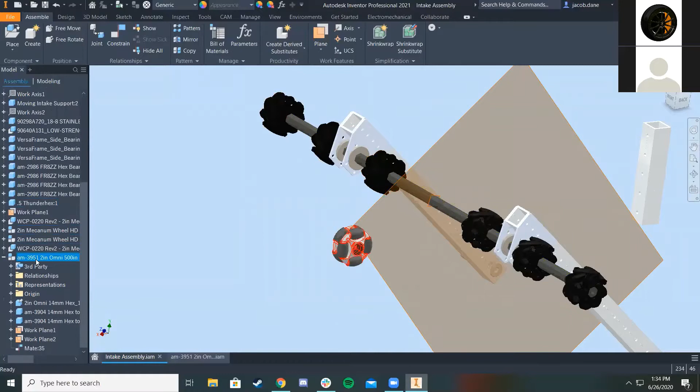Why is it not looking like that? Oh, there are already constraints on it. I think that... no, there aren't. Oh, this wheel is so annoying.

Here, I'm gonna try something. Okay, I'm gonna wait, maybe if I just... yeah sure, that'll work. It's not actually merging with it, but it works, whatever. Okay, and so, are we gonna put two wheels there?

I don't know, we can put like 3. I think the video you showed, the video is 3. And the green one too. Do you have the green one already? I don't think so, it's on the same place we downloaded the other one, just AndyMark I'm pretty sure.

Very nice, this one. Wow. It might not actually be green. If we want, we might have to just color it green, because it could be the same file for both. Yeah, I mean AndyMark probably is.

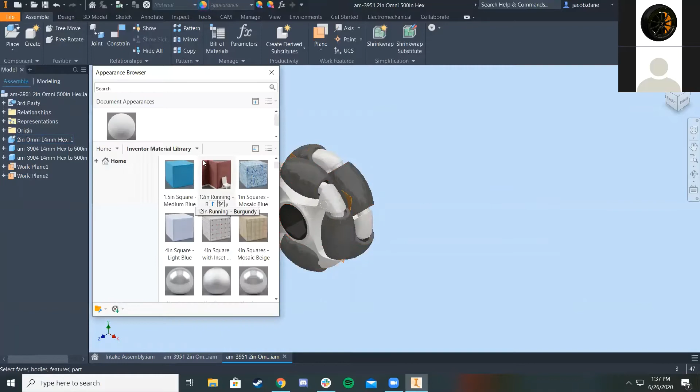Can I just select? I know I can select faces. I'm just gonna try to color the whole thing. That's very nice. Jonathan, do you remember how to just select certain faces and not the whole thing?

Click on... well, you can do it in a regular way, like something that you make, but since this is only one part... I don't know, because each one of those is not really... Oh yeah, 'cause this body counts as one part, so you may not be able to do it. I guess you could just color the whole thing green. I'm just gonna leave it for now, and we can also make that decision later.

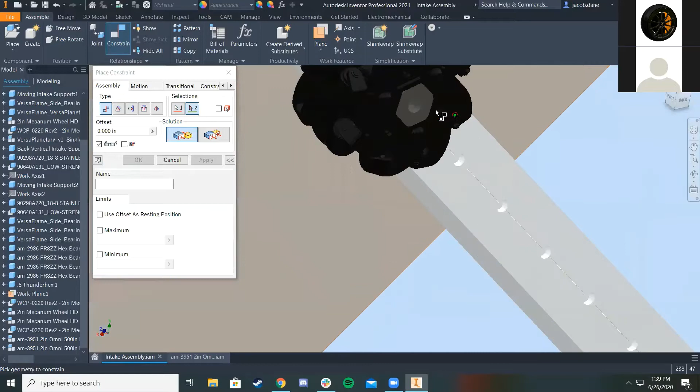Actually, I'm gonna do the same thing as I did before. Instead of clicking on the actual hex faces like Jonathan did for all the mecanum wheels, because that was being weird, I'm just going to click on this circle and then on the circle inside here. It basically just constrains the middle of the circle I clicked on and the middle of that inside too. So I'm just gonna move it out. Oh gosh, it's doing weird things, but once I constrain this face, it'll be okay.

Also, there I was just copying and pasting, because copy and paste makes everything easy.

Oh, okay, that's right. Very nice, now I have 3 wheels in the middle. Obviously this is also just a CAD file that can be very easily edited. So like, let's say later we decide we want more mecanum wheels or whatever we need, we can just change it and it's not a big deal. But this is just to show the general design.

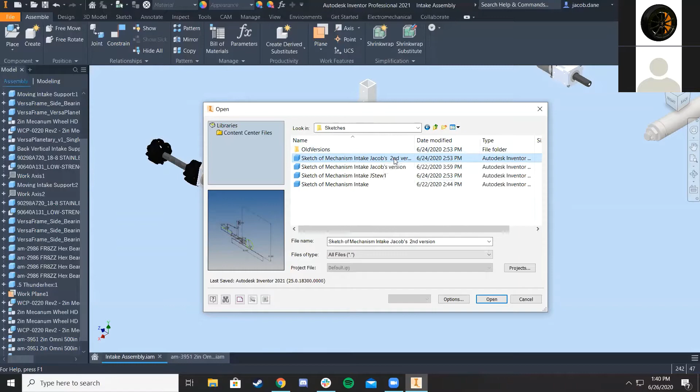Okay, I'm gonna bring back up the sketch and show you guys and kind of explain what I did. Oh no, I didn't save it here. That sounds so lame. I'm gonna save this. I don't know why I didn't save in the right spot. Maybe it's still in this folder. Yeah, it is, okay.

Oh, I also have to bring up the parts. Okay, so for this I changed it — instead of it used to be 10.5 to 15.5, I changed that to 11 to 16.

And so basically on the side, I did the math, because the pieces that I'm going to have to use for the pivot mounts are going to be these two pieces — I think this is one of them. Yeah, so this piece screws onto the end of the piston, and then this is the actual pivot point, so to speak, from where you would actually mount it. And because this piece, as you can see in the drawings, extends it a little bit, by about half an inch, instead of 10.5 to 15.5, it has to be 11 to 16.

So I added some things. And then these hexagons, I can just take that out if you want, but I put them there to represent that this is not a static point — there has to be some kind of joint so it can change the angle, so to speak. It's basically just like a pivot point. So here, touching the ball still, and then I can change this to 11 and put it back.

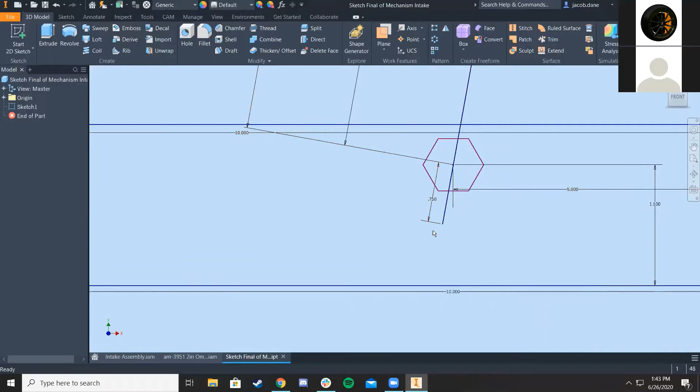Same thing here - I didn't represent it, but this VersaFrame piece will have to be longer than 5 inches so that there can be a hole at 5 inches. That'll probably just be like 5.5, but yeah, okay.

For this piston, to actuate it, I think John separated the piece last time - I can try to find that. Speaking of the piston, it'd be better if you assembled it in the actual intake assembly file so you could animate the whole thing there, instead of opening the piston separately and moving it, which would move the assembly. Yeah, it's already separated into 2 files, so you'd just have to constrain it together.

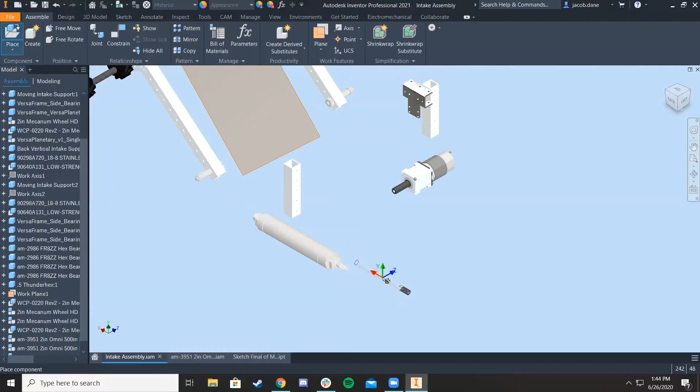Actuating portion, very nice. Because I think this is going to merge weirdly, I'm going to go ahead and open this and delete this end, just cut it off. I already made one with everything except for that one you're about to cut off.

Okay, I'm pretty sure you can just place it. This is the right way. It's kind of hard to tell from looking at it, but from all the pistons I've seen, the longer screw end is always the end that doesn't have the throw of the piston. Okay, I'm just going to leave this.

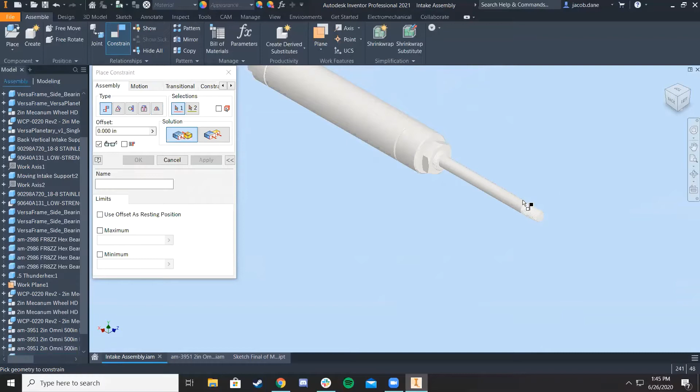So to constrain this, I'm first just going to constrain it with the tubes itself, and because I know that it's 10.5 to 15.5 for the actual piston, I can just constrain it.

I think this should work. It looks super dumb at first. Actually, I'm not going to do it first, I'll do it last. I'll click this face for now, but I'm going to go ahead and put the max and min to 10.5 and 15.5. I might have to make those negative depending on the direction. Maybe it just doesn't even show it - that's kind of weird.

Okay, there we go. I'm just going to go to the part, edit it, and make it negative. Oh, because math - okay, that makes sense. There we go. I'd have to make the maximum negative 10.5 and the minimum negative 15.5 because negatives are the opposite, and yeah, there we go.

Piston is moving just how we want it to.

Now I'm going to go to my McMaster to find this part - there's the name of it, but I'll just go to this first. If you go to pistons, round body air cylinders, double acting round body - actually, no, I messed it up, I think I just look at piston mounts.

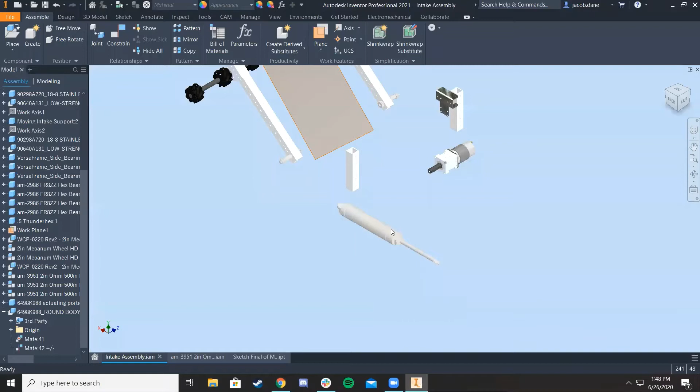If you look at piston mounts it doesn't show it, but if you look in the round body air cylinders and then the kind we want, which is double acting - yeah, okay there we go. If you scroll down then they're all there, all these different mounts that McMaster has that go with all their pistons. So we need both ends of pivot, so I'm going to use these two right now. Our bore is 1.5.

We can go, and the bore is just this dimension, which is okay, it's a little bit more, but it's a 1.5 throw, 1.5 bore piston. I already looked at the dimensions, I selected this one. I think I couldn't find a difference between them because - oh yeah, it's a piston bore. Isn't the piston bore the size thread of the piece? I thought the bore was like the actual piston actuating part.

I don't think so, I'm pretty sure the bore is - what's it called - because like here, diameter. This is kind of in the way, I think it's like duplicate or something. Forget a McMaster. Oh my god, if I go to pistons and then bore size, it's not showing a picture, which is annoying.

I mean, I think if you just go to like a drawing - it calls it outer diameter there. So bore size, okay, it says bore size half outer diameter - wait, that's kind of weird. I feel like just click on one of them and then look at the drawing, you know what I mean? So, oh, that's really weird looking.

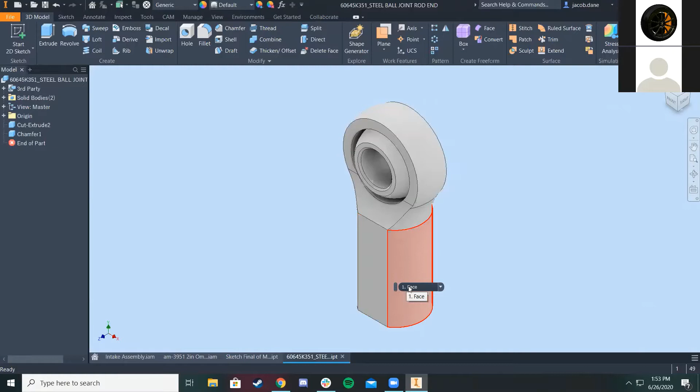Very nice, that's exactly what we need. Save it. And if you didn't already select the right folders and stuff, you'd have to go through to make sure you're saving in the right place. But I already know that because I saved this step file in the right folder, it will just open automatically in the same folder. So yeah, make sure all your files are in the same spot always.

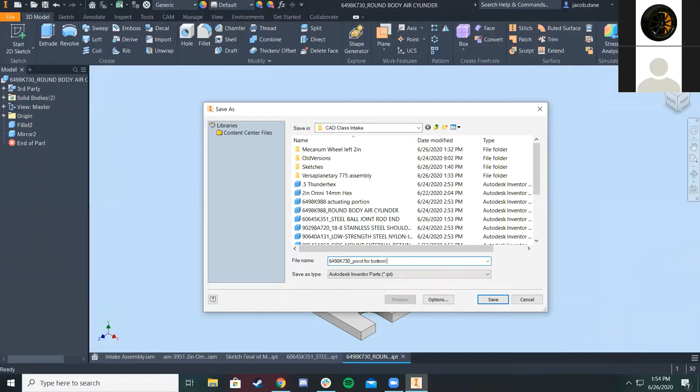Why is it? It makes you think it's not right, but we will see. Oh, it is right, that's such a weird name. Okay. Very good naming.

There we go. And then I'm going to go ahead and attach this end of the pivot onto the piston. That's not facing the right way. There we go.

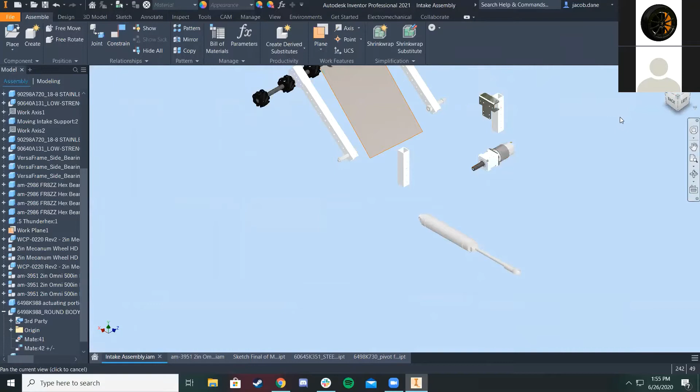Okay, and also from what we did earlier, Jonathan, when he constrained this piece against that, I changed the dimension because I also changed it in the sketch file. So we need the dimension from, oh okay, it's a 15. Oh, it's gonna be kind of annoying.

Okay, so I'm gonna go ahead and make the hole in the VersaFrame here. I'm gonna leave that using the 1/2 inch shoulder bolt size, and then I'm gonna constrain it to that hole relative to the other VersaFrame piece here. Oh, it's already there probably. I don't know if it's not. Oh, I also might change the dimension. Oh, shoot.

So, okay, so now it's 12.5 inches plus 1.25 plus 0.75. That's 2 inches. Okay, that's 14.5 inches.

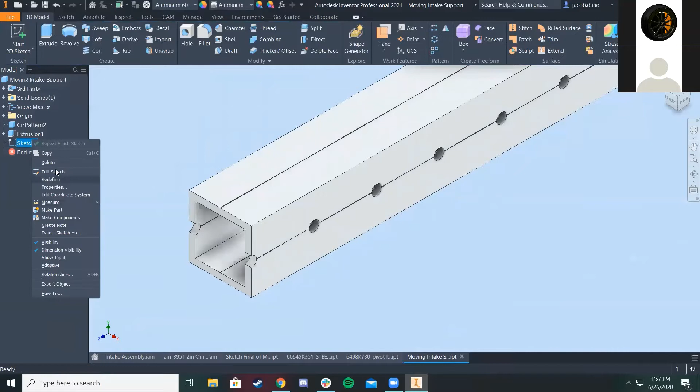Then I remember, because I made the drawing, the part size so that the hole is centered. Actually, I should make a sketch. That's bad practice, but I made it so the hole is centered about this hole right here, so it just makes manufacturing a lot easier. But yes, I measured it.

Wait, that doesn't make any sense. Hold on, that doesn't make sense. Wait, actually, I shouldn't measure it. Might be increased. This is a few days ago, so I might have messed stuff up. Wait, what did I mention? Oh, that's weird. But that's an inch away, and I think it's supposed to be, I made it 0.75.

So, yeah. So I wanted the hole to be centered, and it needs 1.25 of there relative to that center. So, oh my gosh, so much thought.

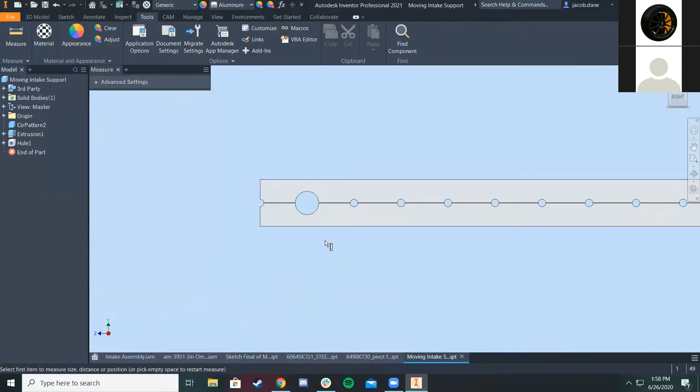Okay, I think, okay, so I know, wait, excuse me, I know. So this pivot point to the end needs to be 1.25 plus 12.5. So that itself has to be 13.75. But...

Very nice. It's not, definitely not. Why? Oh. Okay.

So yeah, that's 13.5, and we need 0.75 more. That's okay, I am confused right now. So I'm gonna go ahead and actually, okay, so yeah, the hole is already here. I can just look at this dimension.

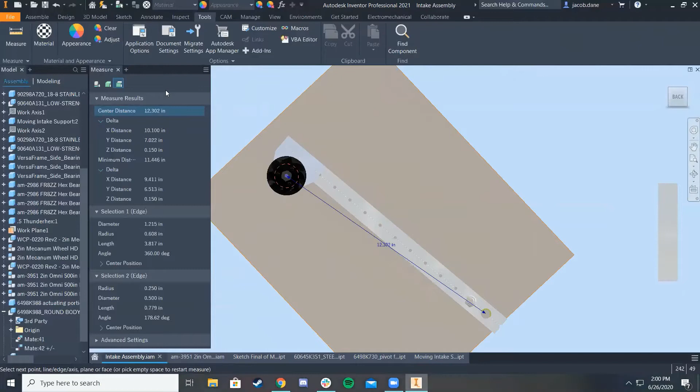That to that. And oh gosh, this is not gonna be nice. Because, okay, so I need this hole. That's 12.25, and it needs to be 13.75, right?

Yeah, so I need to extend it. Wait. Oh, that's actually 12.5, that makes sense. So that means, okay, yeah. So the hole is actually not aligned on there just because of how I made all the pivot points, but that should be okay.

That just means I have to make this hole very different. But we probably have to mill that, because that's like an annoying placement. So I need to make a, I don't want to make it concentric. Okay, I'm going to just edit the sketch then.

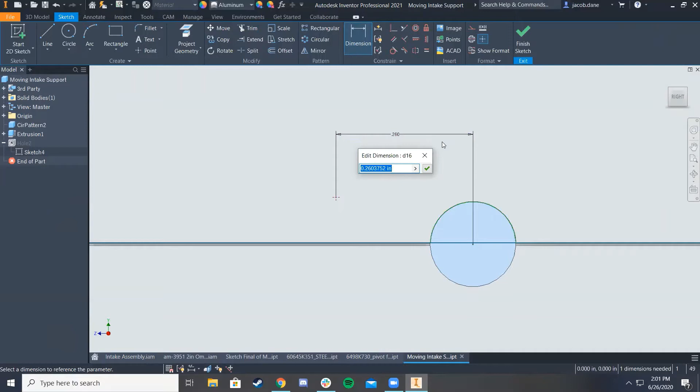Yeah, 0.25. And then this needs to be an inch. That looks super dumb. Okay, I mean, that's fine, but not fine.

Might need to change the sketch more. But okay, I'm gonna try to make it, see if I can just move it over to 12.25 long without messing up things in the sketch. Make this 12.25, that makes that a little bit shorter.

It's down, okay, that's fine. Then, check. I feel like I'm so confused.

But that's 12 inches. Oh, because that is 12.25. Oh my gosh, I messed this up. I'm just like, okay, I feel like I'm being super confusing right now.

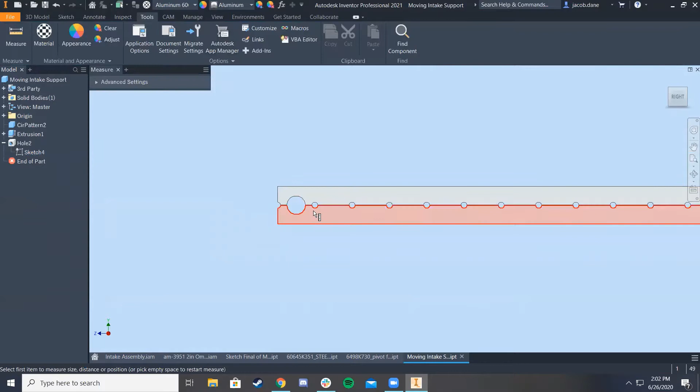But basically, if I put this hole here to this middle one, which is, oh gosh, which is the same point as the other one, that's 12.5.

And then go back to the mechanism. Make this 12.5, that is fine, everything fits. Go back to the assembly. Take a look, this hole lines up with that hole, which is exactly what I want. Okay, hole's in the right spot now.

And then I just, oh my god, let's undo these constraints. Oh, that's right. Okay, yeah, so right now it's...

I think, Jacob, all you have to do is just delete the bolts, because the VersaFrame spinning is not dependent on it. But after, I can delete the bolts, but I need to just reconstrain, because right now it's about like that line right there to this edge, and I need to change that to the correct dimensions, and I don't know which that is.

Wait. Oh, I think it's this one then.

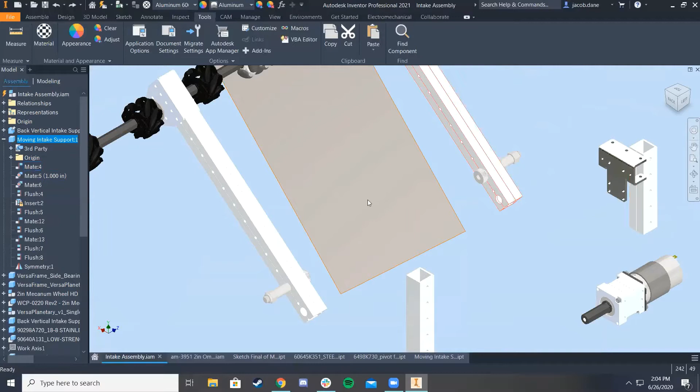So, okay, that's constrained. Wait, oh okay, I understand. That's constrained to that face. And I think...

So, okay, so in the sketch it is, I think, only like half an inch down relative to the bottom of this piece, because it's like 3/4 of the way in this 2-inch piece. Yeah, it's 1.5 inches up, and it's half an inch from the top of the VersaFrame, which is the bottom of this piece. So that's the wrong thing.

I need to change the dimension I was just on. This mate, oh my god. This to, wait, is that not? I think it's gonna make this. I'm gonna look from the side.

Oh, it's about that bolt. It is, okay. Okay, I might have to reconstrain this because it's getting a little wacky. Oh, I see what's happening.

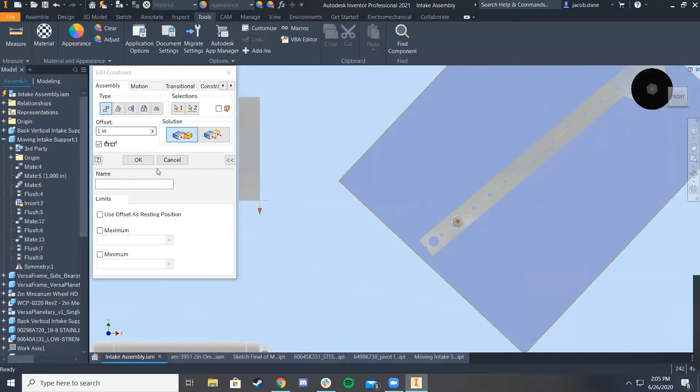Okay, I'm just gonna delete. Is this an assembly, or is it just on? It's just on there, you can just... okay, you can delete both of them.

I'm gonna actually... and there we go. Oh, this is okay. Oh, okay, it's okay.

No, I'm going to leave this constraint, and then this one's free, and I think it's... okay, so I need to go back to the sketch.

So I'm going to take... can you use the measure tool? Oh, you can, that's convenient. Okay, so the front edge of this Versa Frame. Oh, but oh my gosh, okay.

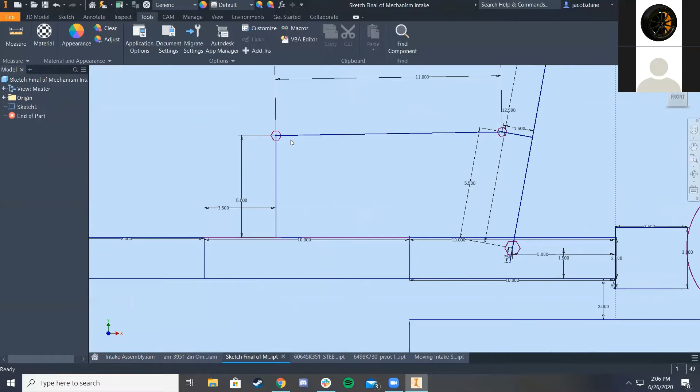So basically, I remember this has to be the pivot point of the back of the piston, and that means with this part, because this is the back of the pivot point, it's going to have to be mounted on the side. So I'm thinking to mount this against the wall of the Versa Frame horizontally, so it's on its side, and that means this dimension, 1.38, is actually the distance from this pivot point to the actual face of the Versa Frame, which might be hard to picture, but it just means I have to make it 1.375 or 1.38 farther away.

So then it actually says in the sketch, if we use the measure tool from this edge to there, 11.5 plus 1.38, which I can just do in CAD. So that hole to this face needs to be 11.5 plus 1.38.

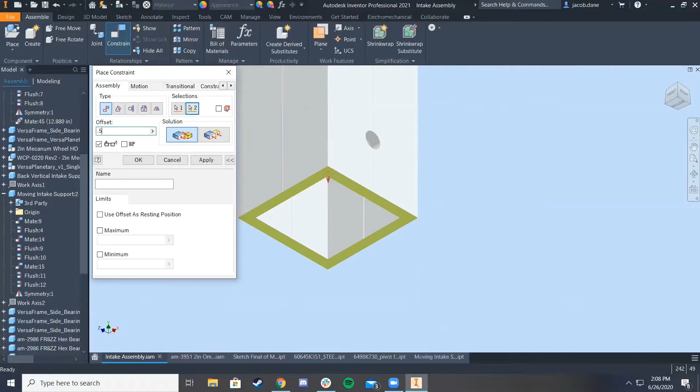And then you need to constrain this from the bottom - oh no, from the bottom by a half inch. And that should be fine. I mean, everything's kind of dependent because of constraints, but once I fix this other piece, it should be good.

This to this. Hey Jacob, one thing - it'd be a lot easier if you just constrained the second piece to the first piece, so we don't have to edit one set of constraints later on, because we're definitely going to have to edit this, you know.

Yeah, okay, so this is what I was talking about. Instead of doing those weird constraints again on this piece, I could just make these pieces flush together basically. So if I do... I guess these two moving together - actually there might already be one, okay, it's not, okay. And then if I make the bottoms flush, then it should be fine. Yeah, very nice.

Okay, I'm going to go ahead and copy this whole assembly for here. Okay, that's the same thing. Very cool. And then, oh yeah, this half inch piece also has to be slightly longer. So like... so I was trying to think, because the problem I'm having, Jonathan, is that I didn't see with this piece.

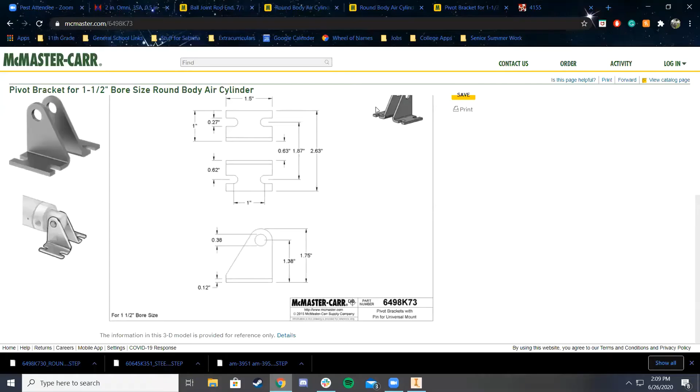That it's obviously wider than 1 inch, so it can't just be placed on a singular piece of 1x1 or mounted that way. Oh wait, never mind, I just realized I'm not using this piece. I am so dumb, I'm so sorry. Okay, I remember my thought process from the other day.

Okay, so actually I'm not using this piece, and I found big strong brackets on 8020, so I think... yeah, so this is the bracket that... wait, oh my god, I need to remember. Okay, no, this is the bracket I'm going to use to mount this piece onto this actual intake mechanism. And then I was going to use this one because that's way easier than that crazy thing onto the 1x1, and it does fit.

We might have to round off the edges a bit, but if you look at the sketch, when you change this line, the angle is not really moving a lot, so I shouldn't need to shave down this piece, but yeah.

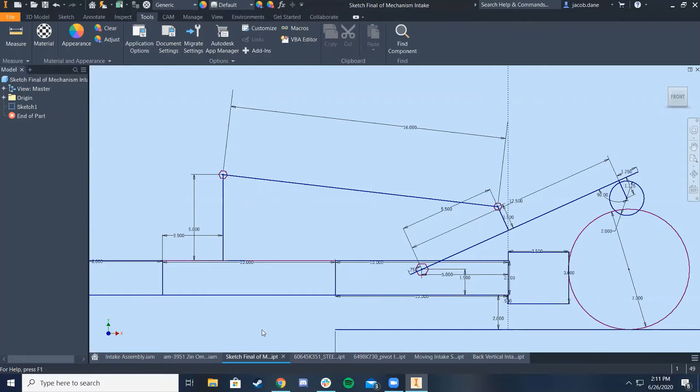And also, the idea is that to download this piece, you need an account from 8020, which makes this difficult. If you're watching this, to get parts in 8020 you have to make an account to download this part. Later on, we might open this CAD up on the internet so you guys can download it separately and get the files that way. But if you're just trying to watch along and do what I'm doing, you'd have to go through 8020 to make an account to get these CAD files. But the one thing about 8020 accounts is you're not actually making an 8020 account - you have to make a Part Solutions account, which is a whole different thing.

So that was the pain, that was why in the build it's really annoying, because you have to go to this random website and make an account. Download random files from this other website. Okay, that's sketchy - generate CAD. Very nice. But yeah, so I can do this, but if you were to try to go through the same steps, it would pull up this thing and say you don't have an account, you have to make an account, blah blah blah. Oh, that's so weird, I sent in a zip folder. Whatever.

So I have to unzip it to actually make this okay. Oh, because it has a terms of use stuff. I don't care, no offense. 8020, but I don't have time for that.

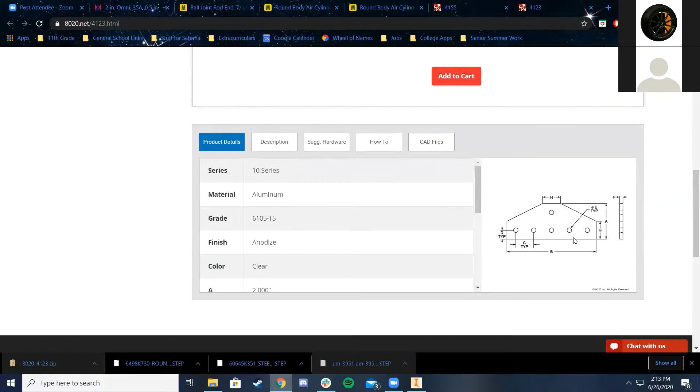Something nice about 8020 is, like most websites, they have the details and all the dimensions. Okay, they actually don't have the dimension that I need. I know the holes are spaced out by 1/2 inch, which gives a dimension, but because it doesn't officially say, I'm just gonna go to the CAD file and get it that way.

So basically what this is telling me is that the VersaFrame will go along this, just like almost all the brackets that we use. Oh, why is it in millimeters? That is so dumb, oh my God.

Hey Jacob, you can just change it. That's what I thought, I mean I don't remember. Oh yeah, you already knew that, document settings, yeah. Oh, I clicked the wrong one. Document settings. But it just makes me mad, like why haven't they, because even the website had the dimensions in inches, but no, they have to do wackiness. That's interesting.

Okay but yes, why 1/2 inch? So that makes the math easier, it's just like an added 1/2 inch from. Oh yeah, okay, now I remember why this is actually harder than it is.

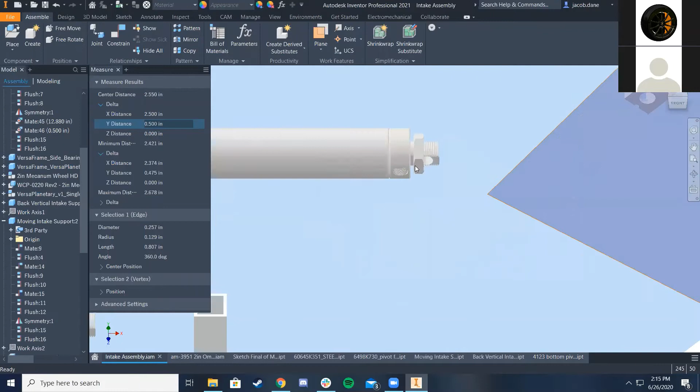So let me go to the piston. The thing is with this piston is that the dimension of like 10.5 to 11.5 is from this edge, like the flat edge right here, all the way to that very flat edge at the very end of it. This one's easy because it just kind of screws onto the pivot point, but for this one, it has to pivot about this hole right here.

So basically what that means is that it's actually slightly less than that 1/2 inch. 0.38 minus 1/2 inch is actually the dimension that needs to add. Oh my gosh, I'm just gonna calculate it. Okay, 0.12. So really we need that, the 11.5 that I measured here, we measured again just to be sure. So 11.5 plus 0.12 is actually what we need.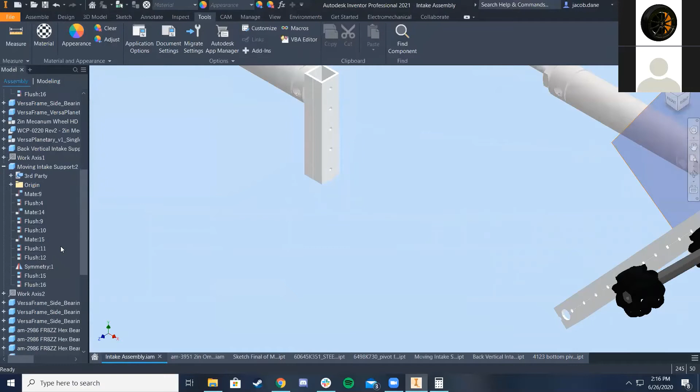Sorry about the bracket changing weirdness, but yeah. Oh yeah, they're down here now. There we go, now it should be perfect. And then, actually, oh, that is, okay.

Okay Jonathan, so in this situation, I would need to have this first frame piece turn the other way, so that the holes are on this side. Should I do that or just leave it how it is? Oh yeah, because if you delete it, then I'd have to fix all the constraints, and that'd be a huge pain.

Well, and in real life, I'm pretty sure you have it in that orientation because we have to have the little L brackets right there, and putting L brackets on without pre-drilled holes, those really specific ones, is like a massive pain. So we can drill all of the holes for the other brackets on the sides with a drill press. Okay, I mean you can just keep it like that for CAD's sake, we can switch it if we need to if we're actually going to use this.

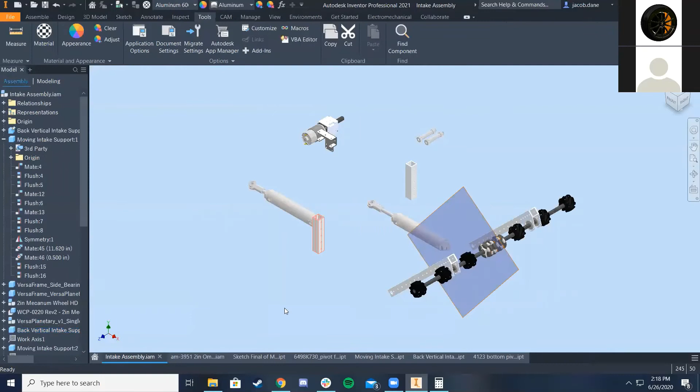Okay, so now I need to figure out how much I need to extend it, because this point needs to be at 1/2 inch, meaning the piece itself has to be added by 2.5 inches, so 7.5 inches.

Oh my gosh, I spent so much time just having to fix things. Okay, guess we may not be done today. I mean, you're pretty close to being finished, I bet you can finish this in like 20 minutes, definitely.

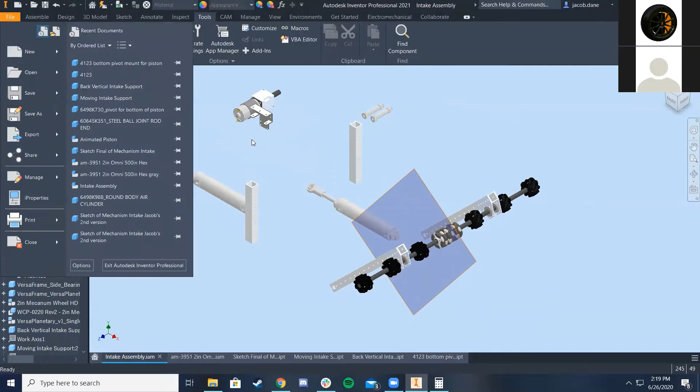Oh okay, that's fine, yeah. Okay, so just gonna save that for reasons, and then I did download the file. No, that is the wrong thing. No, okay, assemble, place it in.

Speedy time. Not totally, if you had a mouse it might go a little faster. Yeah. You know, you're gonna have to get one eventually. No, I don't, like when you get a job, you know. Oh well, for CADing, yeah, might get a 3D mouse.

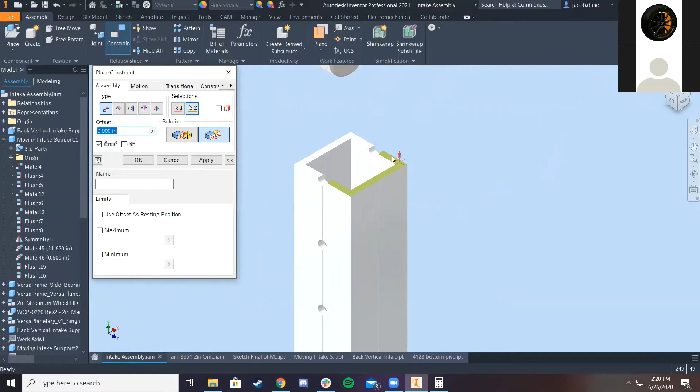Also, it wouldn't matter for the pre-drilled holes because these holes aren't aligned anyway, which I'll show in a second. Oh yeah, because the VersaFrame is flipped upside down, right? Yeah, and we probably want it this way, otherwise that would mess up the mounting at the bottom.

I'm just constraining all these pieces onto this VersaFrame, if that wasn't obvious.

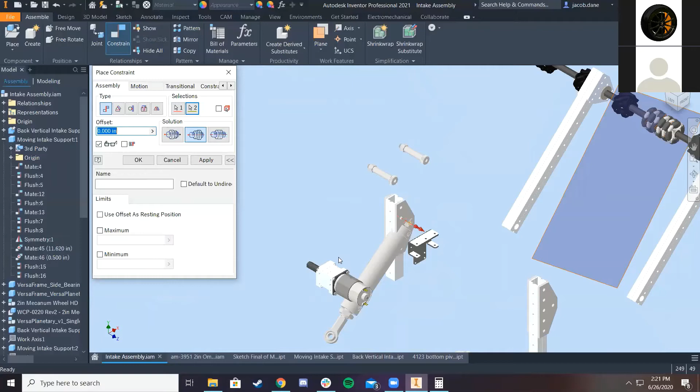But because this does get pretty close, we might have to file that down in actual assembly. Also, because of how we constrained everything, it may not let us match exactly like the sketch, I guess, because of reasons.

Is that the right constraint? That seems weird though. No, that doesn't make any sense. Flush needs... oh, symmetry. Oh, there we go. I need to make that the same, this one.

And why does that still not work? Maybe I deleted the wrong constraint, because I don't know where the constraint actually is on this piece, and it's easy to look at or not.

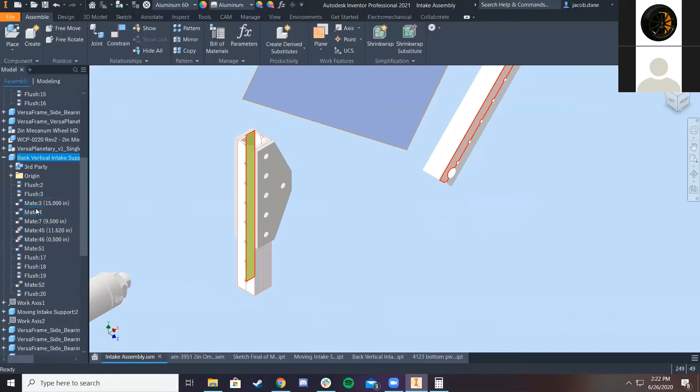Should this be like one of the first ones? 15 inches, that's not right. Yeah, okay, this. It could be because of the plane, but I will see.

Oh my goodness, yeah. Oh, I see. So, wait Jacob, no, can't do that, don't delete that one. Why? Control Z. That has to be the distance because that's the robot distance.

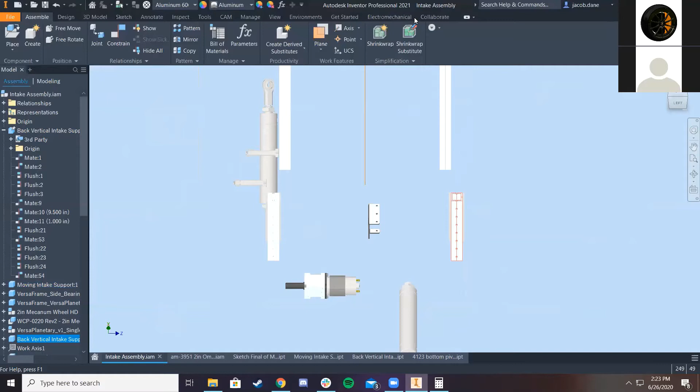That's the robot distance, you know. Well, I mean, robot, that's okay, perfect. I know what you're saying, but isn't it like this between these pieces though? Now those change. Because basically what I'm saying is on our actual robot, the entire intake width and everything would have to change a lot to make this intake work the way it would.

It can only be made smaller than 15. 15 is the max intake width. Yeah, but the idea would be to make it smaller.

Like it would be like that. Wait, that's okay, but yes. Yeah, I guess it's Jonathan. Sketchy stuff. Jonathan doesn't like what I'm doing right now.

More milling. Oh wait, why is this not constrained then? Wait, which constraint are you trying to delete now? Because this VersaFrame needs to be aligned with this one, but I don't know what's constraining it. Oh, you just hit it. Go back, you just were on it.

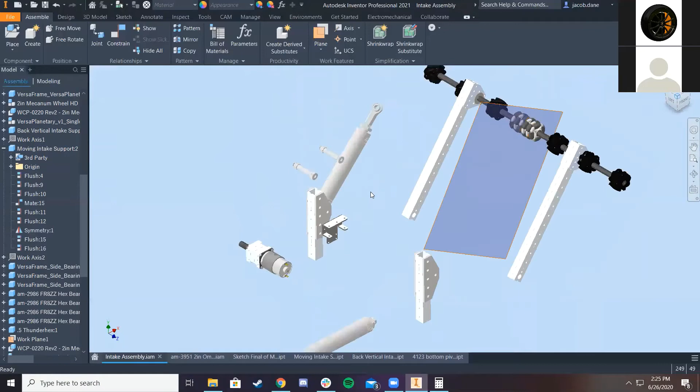This one, yeah, that one, very nice. Okay, and I'm just making these flush. No.

And then I need the other piece that I was talking about, which is this one. The reason it's so high, like it looks different, is because with this bracket there isn't enough space to make a hole there and have this fit in, because the width of this is too much. So the only way it would actually fit, we'd have to drill a weird hole for it in the VersaFrame, and that's not good. So that's why I'm using a different bracket.

Okay, files, all right.

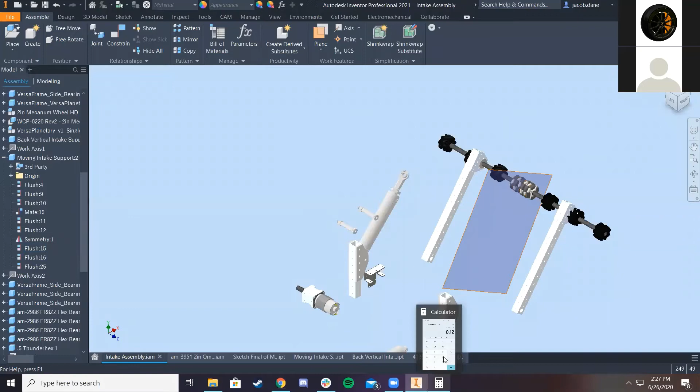And this room would go right here. That, I was thinking in my mind the hole would go here. We might have to cut some of it off. Actually, we shouldn't have to, because this doesn't interfere at all with the bracket. I'll show you when I put it in the CAD.

Yeah, the sketch. So the middle of it has to be 5.5 inches away from this pivot point. Oh gosh, okay, I don't like this. This math is not fun. We have to make our own holes for this.

I'm gonna do it from this end because that's the correct dimensions. So 5.5 plus 1.5, that's 7 inches. That is just not math. 7 inches from this line to this edge here, plus, so that's 8.25. So the middle of it, oh my gosh, okay, so that means the middle of this piece has to be 8.25 inches away.

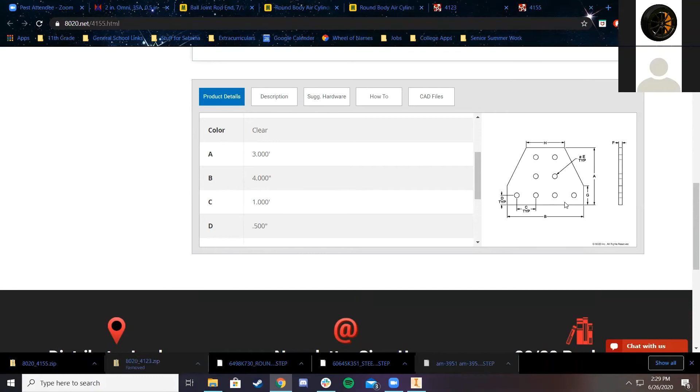Also, should I bother making the holes in the brackets too? I'll have to for this one, but for this one, should I drill out the hole to be bigger in CAD? I mean, no, kind of no - we're the ones that are going to be building this, so. I kind of understand what it's doing.

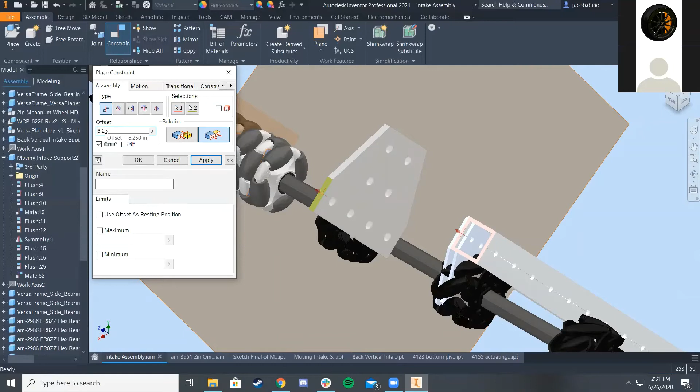Oh, that's weird. Oh, that's messed up, I have to fix that. Oh, and that wheel is also, why? Oh, because yeah, it's like it's not center anymore. Oh, because everything is like, oh gosh, it changes everything. It's just because of how it was constrained before.

That shouldn't have fixed it alone. It should, okay, oh my gosh. Wait, oh, because that dimension has changed. No, it wasn't my constraint. You deleted it. No, I know. But this just depends on what. This can change as much as we want, really. This can be wherever, I guess, for now.

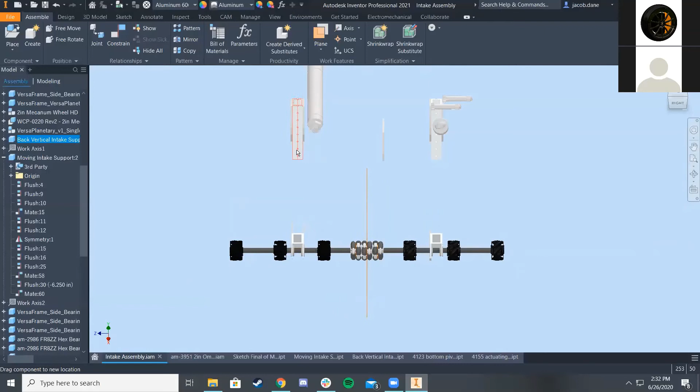Should make it 15. If 15 fits, then I'll do it. It might have to be like 14 or something.

There we go, wheels. Why are the wheels still crazy? Oh, because of the other offset. Wait, okay, okay, wait, why is it okay? I'm kind of confused right now. Wait, is it standard or not? Okay, I think it is. Yeah, it is, okay, just because of other things. All those crazy motors have just been sitting there.

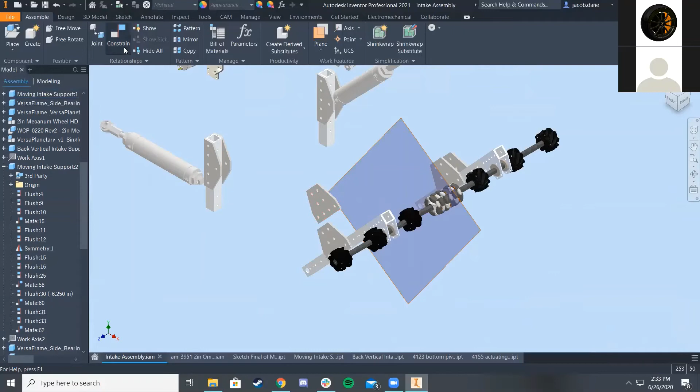There we go, wait. Finish that one. Then I need to open this, make a 7/16 hole.

7/16. What? Okay, what is wrong about that? Why is it? Oh my God. That is so lame.

There we go. Oh wait, that's actually, okay wait. Oh, that's not working, never mind. Oh, I should have, doesn't matter, it's too late now.

When you're making a hole constraint, if you're not trying to constrain it to a circle or something, you should be able to just add the dimensions while you're making the circle. But because I forgot to do that, I have to do this.

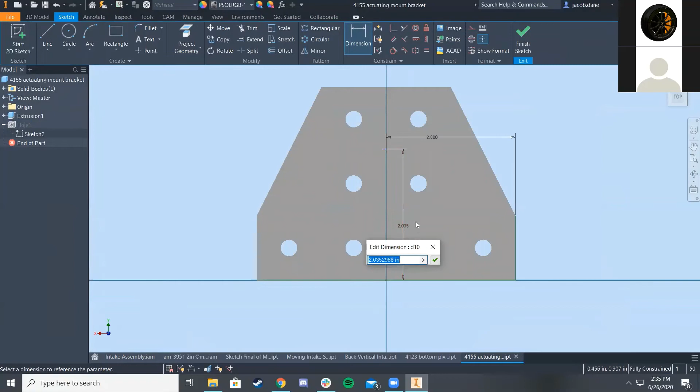There we go. Yay. And then, oh my God. Wow, look at that, it's like almost together. So cool.

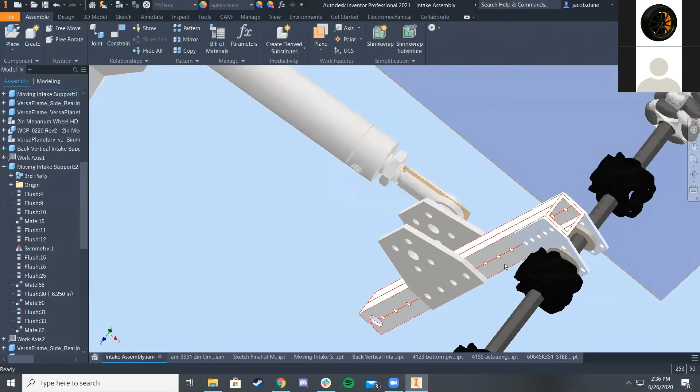And that is weird. There we go, that's what I want. Mid plane with 2 planes. There we go, Jonathan appreciates my plane use. Definitely. And then I don't know if there's already a plane. I think I'm gonna assume not.

Oh yeah, forgot I said I was gonna do the whole thing where I said I'm gonna do, but basically I'm trying to constrain it because obviously this piston is like, yeah. So I'm making a plane with these two faces. And if I constrain the 2 planes, then it's, oh gosh. I think I need to switch to flush.

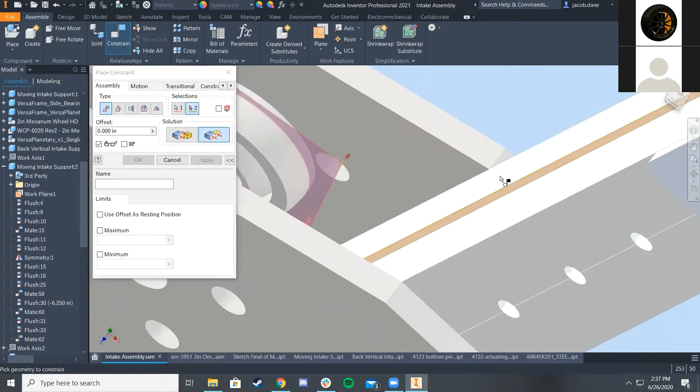Yeah, beautifully, there we go. Also, usually if a part doesn't immediately move when you're constraining things, then that probably means it's an impossible constraint, and Autodesk is very confused. So we have this sunglasses box unchecked, right below offset. Then it doesn't show. It's an official term. Very slow, but Autodesk can do it. Cool, oh yeah, very nice.

I just realized we probably didn't need to delete those bolts. I don't know why we did that. These? Yeah, what about them? I mean, I can put them in there if you want. Put them in, you know?

All right, so do you want to just grind until 3 o'clock, or do you want to finish on Monday? I mean, I can keep CADing, I don't mind. But obviously this can change depending on which side we're mounting it and that stuff. But yeah, for now, I'm just gonna put it in this way.

Oh yeah, it is clipping a little bit, so you would have to shave that down ever so slightly. Bolt cutters, yeah. I mean, I guess I can make the hole on these too.

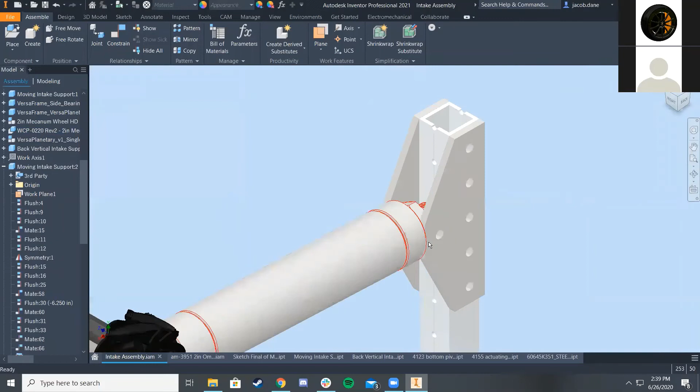Save that, then gotta go to McMaster-Carr. Wait, actually I need to figure out how long it has to be. Nice, 1.376 at least.

Wait Jacob, you don't have to put bolts in right there. What do you mean? Are you putting bolts in? Yeah, to pivot on. My bad, I'm crazy, keep going. I thought you were attaching the bracket to the VersaFrame with bolts, and I was like, that's a little... Oh no, well you could if you were just trying to get big, yeah, but...

I should just look it up. I'm looking right now, there you go. That is the name, I was like...

The shoulder length has to be that.

Which one do we use? 1818, this one? No wait, I scroll down, I'm pretty sure there's one that's not same size thread. This is like regular, yeah, there you go. It's 1818, this one? More. Yeah okay. Stainless steel, fancy, 18-8, not 1818. Yeah.

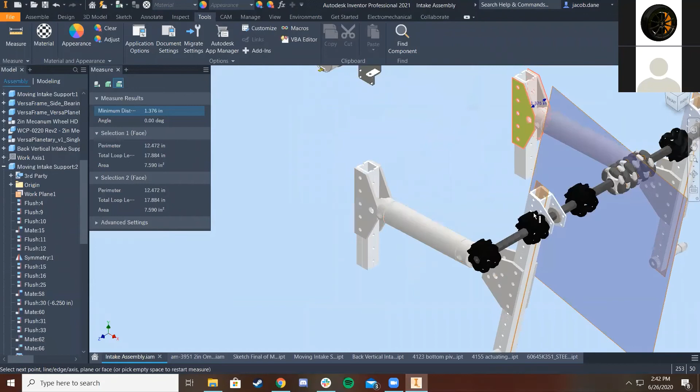Found it, personally, it's on Grainger. Grainger.com, they sell it's like a... Does it have a CAD download? It's kind of like a McMaster-Carr, but yeah. Is there CAD? Oh let me see if they have CAD.

Oh dang, they don't. That is rough. Yeah, really rough, we might have to just not have the bolts in. I'm pretty sure that you can just put it in, I'm pretty sure you can just do it in CAD, you know, like the design accelerator.

Oh, and then we can just buy it from Grainger. Yeah, okay. I do not... nice. I remember you showed me. Where is it? Left, keep going. Yeah, left, right next to assembly.

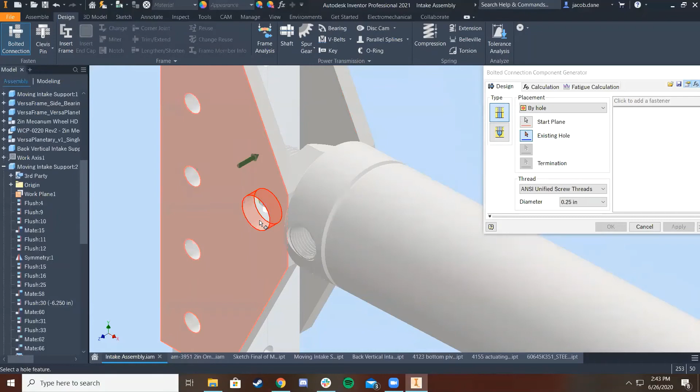Placement instead of linear, change it to by hole. Oh okay, yeah. So start plane is this. And then existing hole. So, oh wait, I know. Oh my goodness.

Termination, what I want to end, I don't know. Is that, yeah, click that face, yeah. And then okay, click to add a fastener, right there.

Oh man, content center, it's kind of slow. Oh, do you have the content center downloaded? Because I think so. Alright. No, it's not working, try to do it again. Oh there we go, okay.

So then you can make it bigger from the single thing, but it's basically just, I don't know if they have shoulder bolts. I think this is a clue. That's something that's different, I don't think they have it. I think close to that is this. Yeah, do that, that's fine.

Okay, and then you click the bottom, click to add a fastener right here. And then you can just click the category button. Yeah, then do nuts, and you just do the first one because they don't have a lot of nuts, I'm pretty sure. Okay, and okay, yeah I should apply.

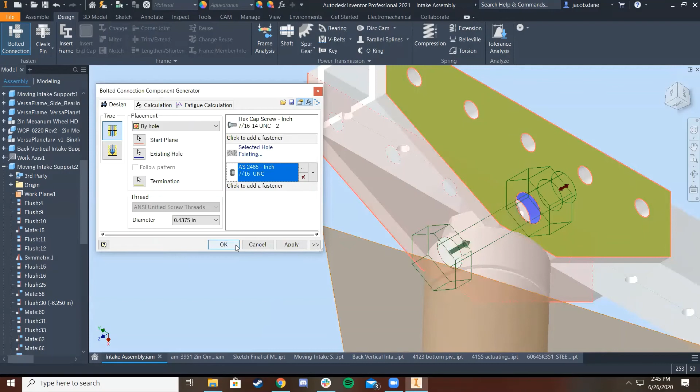Executing bolted connection. Thanks. Very nice, fancy bolt, and it's shiny, which is very fancy.

Wait, that's not right. Oh, I have to do this.

Okay. Very nice. That's just beautiful.

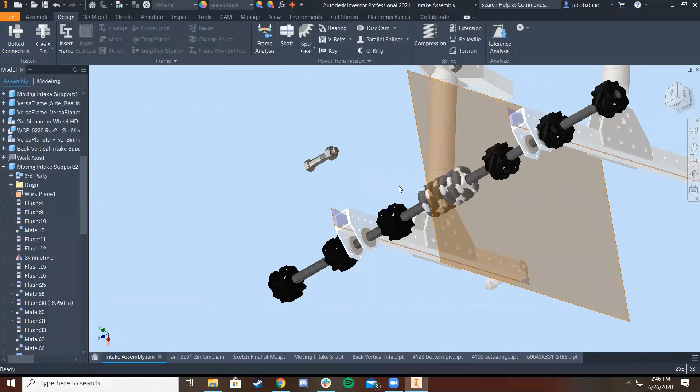I should just be able to do this, like copy and paste it? Yeah, I don't know, does that not work? Oh, I guess it just... there you go, okay. It's pretty cool.

Oh no, I want to insert it. Yeah. Oh, the nut didn't go with it. That's so sad, okay.

Maybe we should just use the design accelerator. I don't think it likes that. Yeah, stealing its bolts.

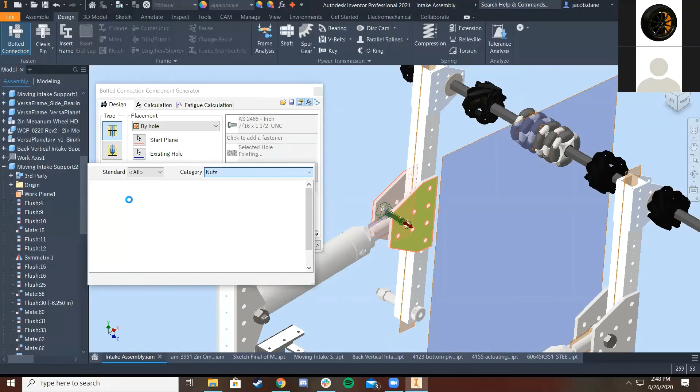Yay! And so close all of that. Dang, I don't need that. Oh, the motor mount, dang it.

Okay, the motor mount. So I can probably just mount it here and then sprocket on both of these. Right? Would you agree, Jonathan?

Yeah, one thing I saw in the video is that they mounted their motor inside their frame so that when you get hit... but since this intake would be out pretty much all the time, we could mount it down, but here's where they did it, right there. I mean yeah, sure. Should I mount it there? I mean obviously you can change this whenever, but I guess sure, for now I'll put it there.

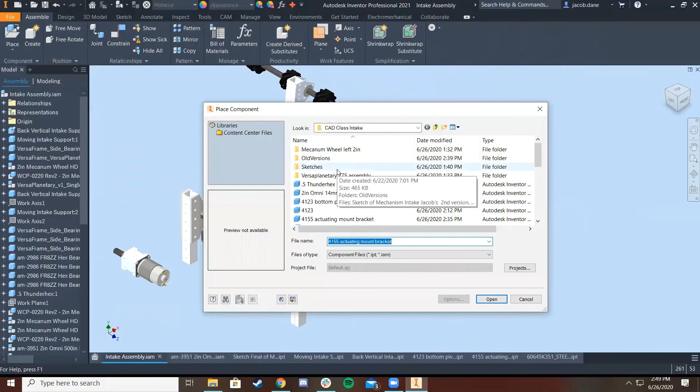Okay, and you probably don't need the CAD sprockets because that's a whole other thing. I was just gonna download those, but... yeah, I'm pretty sure it's already in there though.

We could do 2 motors, but no. Right here. You know what, I like this one more. Dang, that was my motor. No.

Yeah, so for these plates, they're kind of weird. So you would think you could be able to just constrain this edge onto the piece, but it's actually offset slightly. So I think you kind of have to just go by the holes, which we would have to make our own holes probably because this is like... well no, we can do it this way. What? Why is that so?

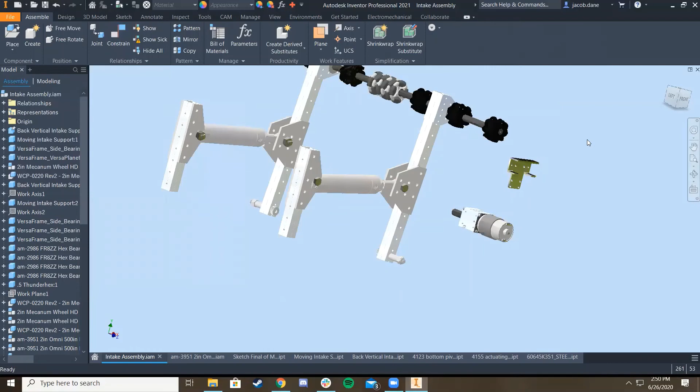Oh, you have a sick relationship up there. Not like, yeah, you know what I mean. Wait, what are you saying? Like this right here, how it says when you have something that says 'sick', then you have to delete that constraint.

Wait, what is that constraint? I don't know what these constraints are. Kind of just delete it like that. Oh, I can... well no, you gotta go find the constraint on the side. Oh yeah, it's just this thing. Oh I know, it's because you changed the hole. What do you mean? Like you made it a 7/16 hole for that bracket. Oh yes, yeah, okay.

Oh my goodness. Very nice, now I should no longer be so sick.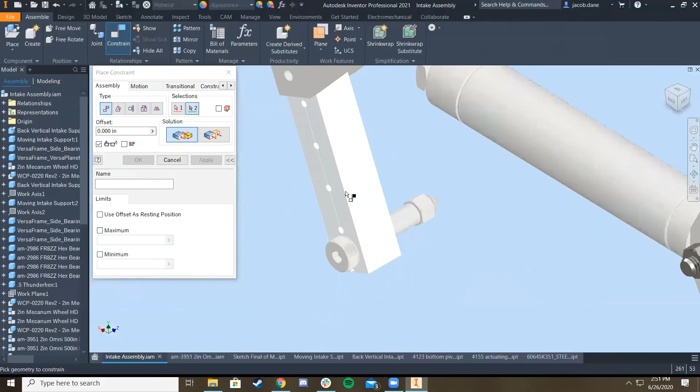Yeah, some of these I changed the material and some I just didn't. But which holes do we use on this? Is it these? Yeah, go to the right one. Yeah, that one, this one? Here, I'll just wait, zoom out a little bit. It's this one. Okay.

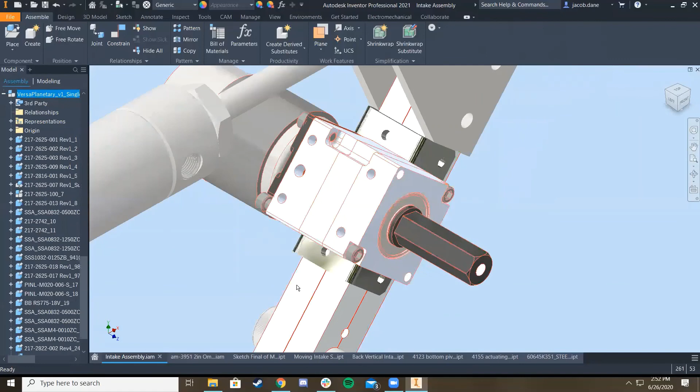Dang, it's so sketchy. Here, I got you. Actually no, it's the wrong one. Let me show you which hole it is. Yeah, it's that one. I know, but I have to do this. And then...

Wait, that's... gosh dang it. I realized because, okay, this hole will be on that one, and then this one will be on... wait, that's backwards.

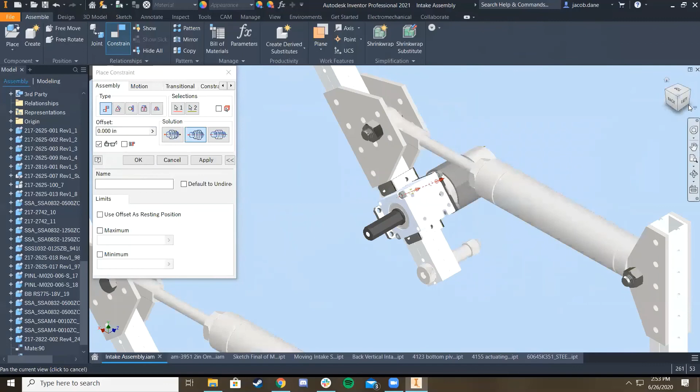Is it? Well, because you would want the motor oriented right, because balls are going to be coming through that channel. So would you want the chain sticking out right there, or the motor sticking out right there?

I don't know, I guess it's probably why we have it up here. On the video, they had the motor sticking out to the left, the motor on this side. They also had a ton of little roller bars going up and down it, but I think that's kind of unnecessary because the balls are tiny.

I think they put the motor on the inside so the chain wouldn't cut the balls, because you can get a foul from that if you destroy the yellow part on the outside. So I should have left it how it was. Okay, Control Z.

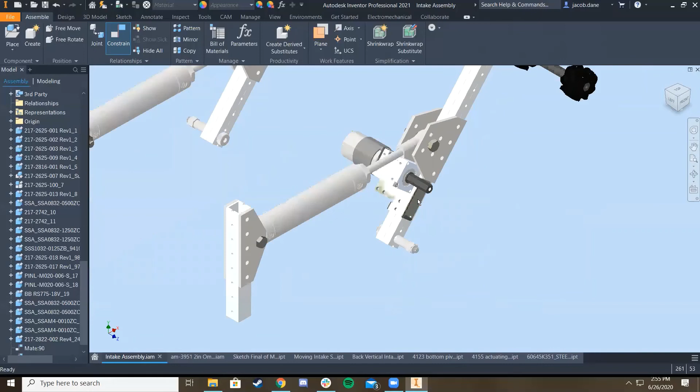Is that right? No, it's not gonna change. Okay, yeah, there we go.

Should I get the sprockets or what? I guess it's 255, so you could just get the sprockets, put them on, and that'll be the end of it. There are a lot of places to get sprockets. I'm just gonna get the ones from Vex Pro.

22 options. We want half-inch. Oh no, 16. What, sure, we usually use 16 for intakes and outtakes and stuff like that. You can also do belts. Oh no, please don't.

That worked well for the winch, but for an intake it'd sound like a vacuum cleaner. Do you have chain on the winch now? Well, I guess belts work well for low speed and not a lot of force on them. Kind of like lame chain.

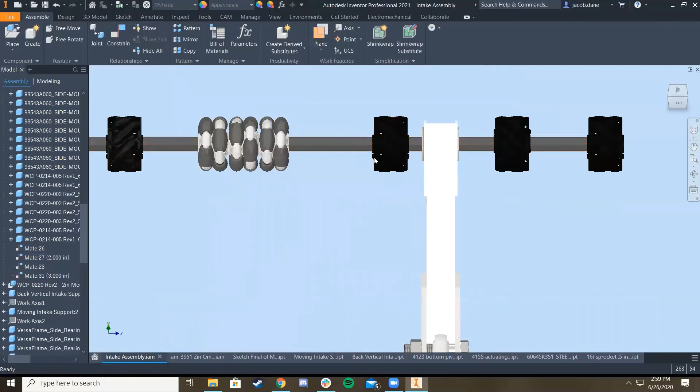Yeah, if I can change this 2 inches. It did move that one. Yeah, you'd have to change the other one to 4 instead of 2. That's fine. No, if you just change this 3 to 4... I think I know it will, but we could leave it. I don't know.

So many files, this one's just way better. Yay.

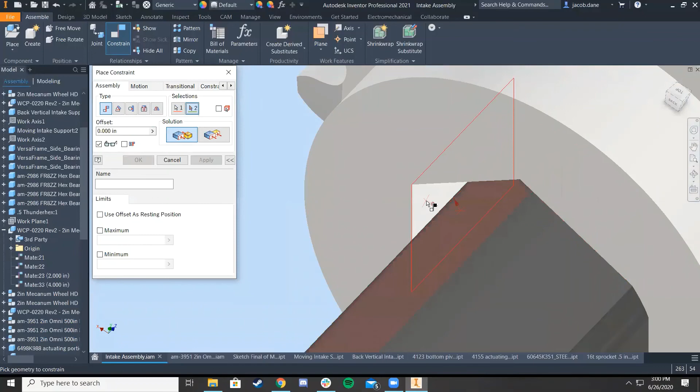I feel like it's in that wheel. I don't like it. Okay, this is gonna - alright, I need to - there we go. Much better.

And then I'll just make that like 0.25 maybe. Oh, that's not gonna work at all. Maybe this is like, I don't know.

I feel like these holes should be mounted here, you know? Yeah, I think that's how it's supposed to be, so it connects all 4 holes.

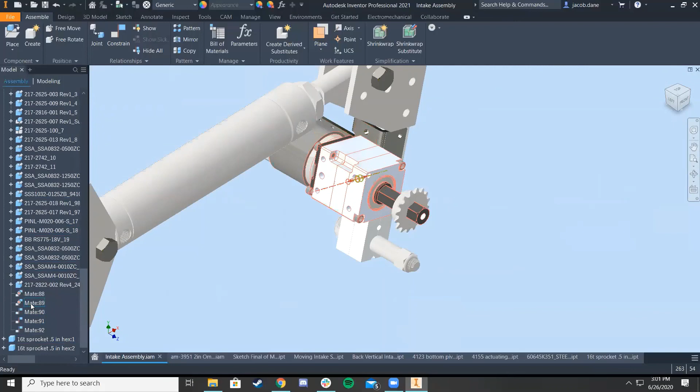These mates. Oh gosh. I can't see the hole. There we go.

Okay, and then I'm just gonna make that flush with that. Right, that seems to work. We could move it out more just because that's kind of close. But like, would it actually touch that? Oh yeah, it probably would. That's a pretty long chain. I will, probably like 0.5 or something like that.

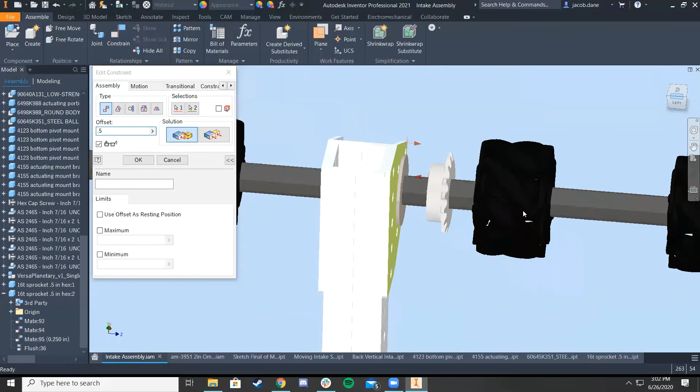Okay, that works. I'll also do the back end, change it in real later, but for now I think that is good - that pretty much does what we want it to do. And if I want, I can even grab a ball - wow, so cool. I don't even think that's it, right? I guess that's it. Yeah.

All right, now all I have to do is show this to Mr. Spencer. Mr. Spencer, oh no.